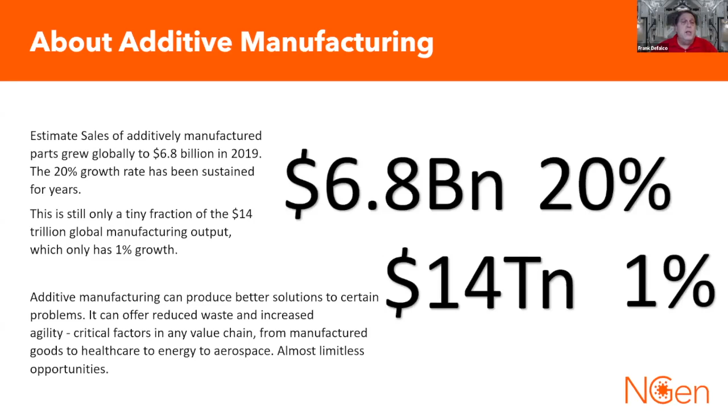If you need that, have a look at them. There are companies like Axis Prototype that have been doing that for a while—they really know how to take advantage of the technology. Coming into Ontario, I have companies like AMM. I'm going to show a case study from them.

Burloak, companies like Mosaic 3D have created a brand new 3D array printer, which NGen helped fund—just to help. The idea is to get to production. Much of what we're trying to do at NGen is introduce additive as a production option, not just as prototyping. Prototyping is great, it's been done for a while.

Going west to Manitoba, we have Precision ADM—one of the world leaders in medical device building with additive. They do some really great stuff; I'll show something about them afterwards as well. Going further west to Alberta, you have Exergy, a great company really doing stuff in the energy sector to help make it greener.

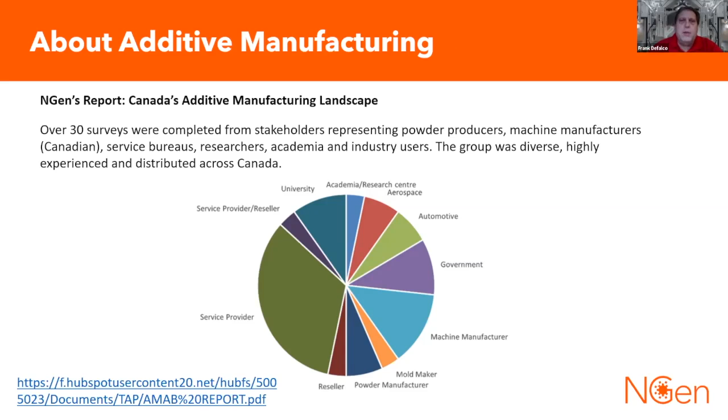And this is something, as Michael mentioned earlier, I do lead the advisory board at NGen. So we regularly meet, trying to keep a pulse on where the sector is, what we can do to help, and most importantly, how we can help industry understand how to take advantage of the expertise offered around Canada. So let's go to a case study, okay?

We'll come back to—here's the case statement. This is done by Additive Metal Manufacturing, a group in Concord, Ontario, GTA, Toronto if you like. Here's a program I've worked with them on just recently, just a few weeks ago. This is with a company called AEM Power Systems, okay?

So if you see the initial step file, that top one, A, okay—it has critical internal features that have been designed and optimized. They couldn't be changed, okay? So if you look at B and C, AMM was able to offer some alternative designs with a few different iterations, until they finally arrived at D. It's hard to believe they're actually the same part.

They took the approach of printing only what was necessary. That's one of the big reasons we call it additive versus subtractive or traditional manufacturing—you're adding material versus machining, where you're removing material, which is kind of a green component about it.

I don't want to necessarily call that a very green technology. It does take a lot of energy, but that's an area where there's a lot less waste, and less waste is certainly a really important consideration for the world. So this substantially decreases the size and mass, and as you do that, it becomes cheaper.

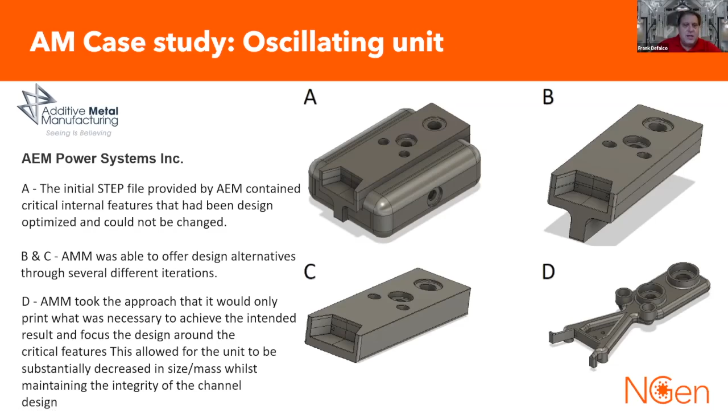Okay, so after the multiple CAD design iterations, the final design, you can see again going top to bottom, it was put onto the top. It's a 70% weight savings, print time reduced by 57%, and the price is a 58% savings. Again, because of those things where you have less print time. Most of the cost for additive is materials and print time, so if you're able to reduce both, you get less than the initial design.

So some of the benefits are design freedom, speed to market, part consolidation, avoiding assemblies and tolerance stack up, mass reductions, thermal management opportunities, and importantly, complex geometries.

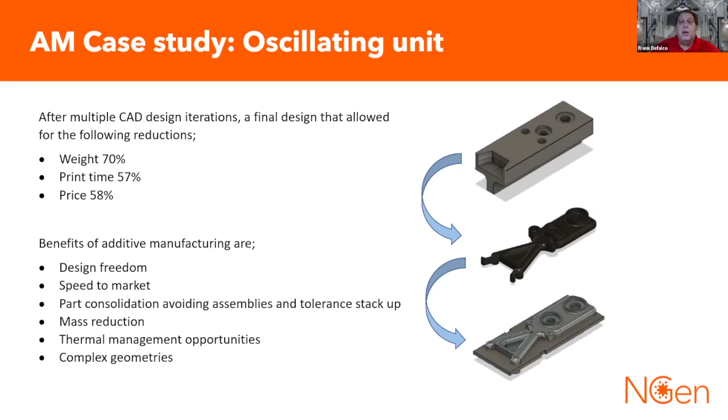Okay, so that's a really interesting project, and I'm glad to help fund this through our AM demonstration program. So here's an interesting project that was done by Precision ADM. If you remember, they're the ones from Winnipeg. This was a groundbreaking project.

This is one of my, I don't know, feathers in the cap, if you'd like, that I was able to fund with just a $5,000 project. So you can see a pipeline inspection gauge. You can see the gentleman there putting it into a pipeline. So as it is, it's inspecting the pipelines, and you can see it a little bit better.

I have a couple of other pictures, but one of the great things is that when the company approached me about using additive as part of their manufacturing production, they weren't sure of the quality of the metal. Okay, could it stand up to the rigors of the environment they're working in? Right, it's really, let's face it, it's oil and it's a pipeline. It's not some place where most machinery is going to hold up.

So as I explained to them, if the company knows what they're doing and you get a quality metal part, it's equal, if not superior, to cast, or superior to a cast. So it's a good way of doing it. So we funded the project.

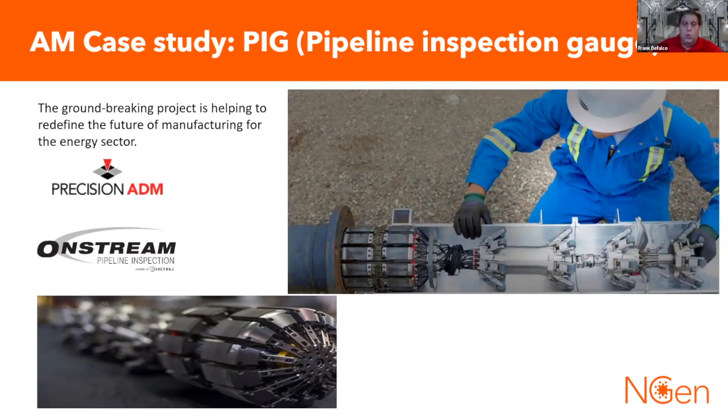Okay, you can see here on the right, my contact over at OnStream, the company that did this, told me he called this his little terracotta soldiers. Okay, so that's the parts, the different parts built on a build plate. So you can see you get several amounts of them. So there's a little bit of economies of scale, not a lot, but there is some.

But you're not looking to do millions, right? If you're looking at additive, you're looking for low production runs. So that's the area. If you're not looking to build hundreds of thousands or millions, if it's just hundreds or thousands, you may want to consider looking at additive as an alternative, because you can really shorten your supply chains and your time.

Okay, so by consolidating parts, improving lead time, AM offered a solution to reduce costs and create a newly designed pig with improved performance, while allowing design, this is important, design to dictate form as opposed to manufacturing techniques. So you really are allowed to envision how you would like it to look. And then, there's always going to be constraints with whatever technology you use.

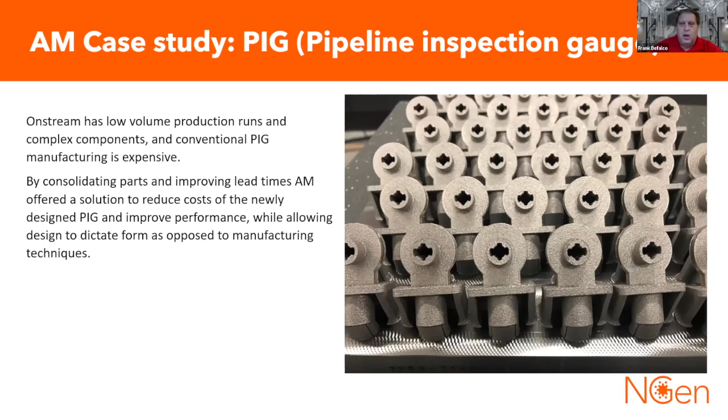That's true, but the idea is that you do have a whole bunch of new freedoms and a whole bunch of concepts to consider, new ways of building things that are exciting.

So that's great, just to let you know, okay, when I did that with a $5,000 project, the company is now buying $1 million worth from the service provider. So Precision ADM has become one of their main service providers and sourcing of products. So they started with one part, now they're using many parts as you start to investigate.

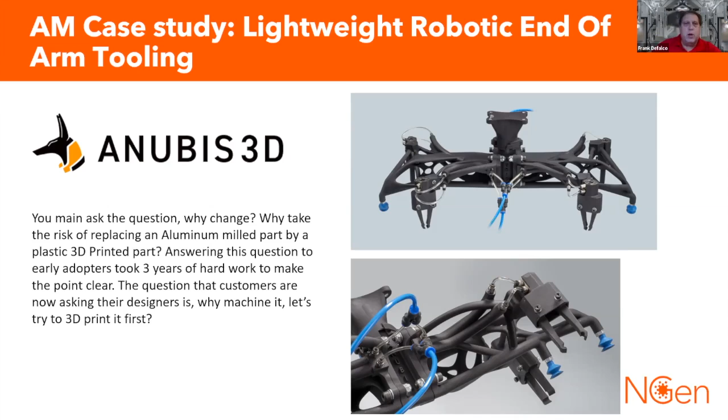It's really, really a particular area to look at for assembly line and end of arm robotics. One of the really interesting parts of additive that's only starting to really take off. Okay, Burloak, some of you may know, is in Oakville. It's a division of Samuel. This is a project they did with MDA, a satellite antenna parts. These are, again, space, aerospace, the sweet spots for additive because you're not making millions of satellites. You're going to make a few, if not maybe just one.

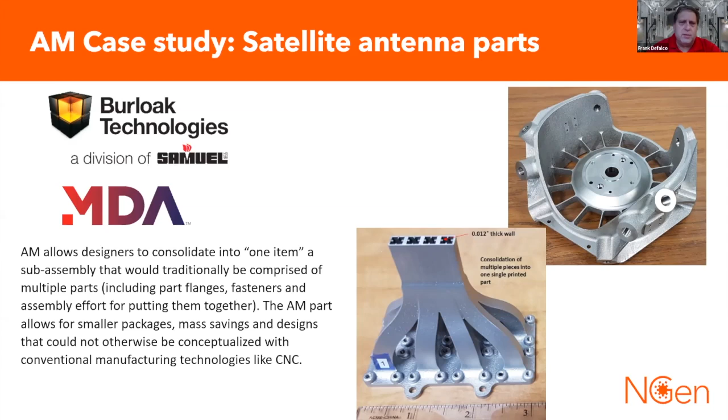So you don't need a lot of parts. AM allows designers to consolidate into one item a sub-assembly that would traditionally be comprised of multiple parts, including flanges, fasteners, and assembly effort. So you save even money because you're not having to assemble those parts. It allows for smaller packages, mass savings, and designs that could not otherwise be conceptualized. You can't do that with a CNC machine. As great as CNC is, it's great, but one thing to remember is additive isn't going to replace traditional manufacturing. It's a new tool. I'll talk a bit more about that afterwards.

Okay, so I want to talk about some of the opportunities and tips available. When you're talking about AM, think about part consolidation. You can save so much if you have a part with fasteners and clamps, hundreds of parts, and you redesign it. Suddenly you remove those hundreds of parts, and you think, great, now I don't even have to assemble those parts, so the time saving is there. But also you have to consider the overhead, the paperwork each part entails. When you're in business you always have to do inventory, and you don't have to count hundreds of parts anymore, you count one. So the savings can really be substantive once you look at the whole life cycle of a part.

Freedom of design - I showed you some of those parts we did. The design complexity is a whole new way of thinking you need to do. One interesting story I heard is that traditionally when somebody's designing, let's say, a channel for a manufactured part, they're going to make the channel circular because they're going to drill it. Well, you don't have to consider that. You can make it a square channel or a triangle channel. Maybe there's ways the flow works better in a different configuration. It doesn't make a difference for time because you're additively doing it, you're not drilling that hole, you're just not putting material where the hole was to be, and it could be any design.

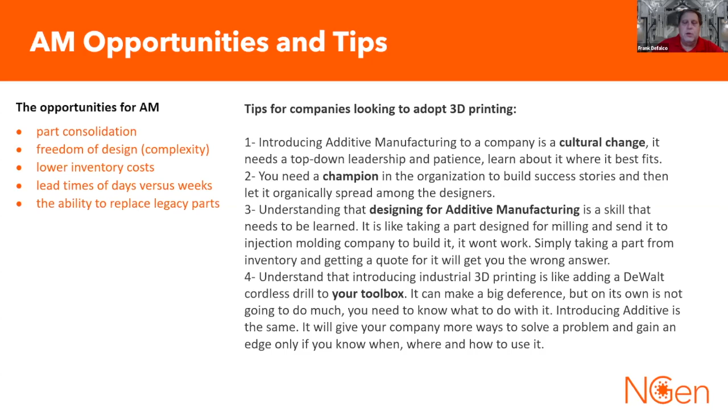So introducing it—it's part of your toolbox. Understanding that industrial 3D printing is like adding a DeWalt cordless drill to your toolbox. It can make a big difference, but on its own it's not going to do a heck of a lot—you need to know what to do with it. Additive is the same: it's a new and very powerful tool in your toolbox. It can make your company more competitive, solve problems, and help you gain an edge. But you've got to know when, where, and how to use it. Those are very important considerations.

So on to NGen's additive manufacturing demonstration program—something I've been running for quite a while. Before that, some of you may have known I was the lead over at Canada Makes, and one of my responsibilities was to run this program. I've seen hundreds and hundreds of companies come into the program, and I've told them sometimes, no, additive's not a good solution, which I found very useful. Sometimes companies are curious, they hear a lot of hype—hype is good, but it can build unrealistic expectations. Really, one of the goals is to find ways where you can introduce additive as part of your production. As mentioned, it's really useful for prototyping—that's been established for a few decades now. But the idea is, how can you use it in your production?

And I showed you a couple of examples there.

The requirements to participate: companies need to be NRC-IRAP eligible with a referral from their ITA. If you don't have an ITA, I'd go to the concierge service at NRC IRAP - it's a great free service available to all Canadian SME companies. I think you have to be in business for a while, but I'll look at that.

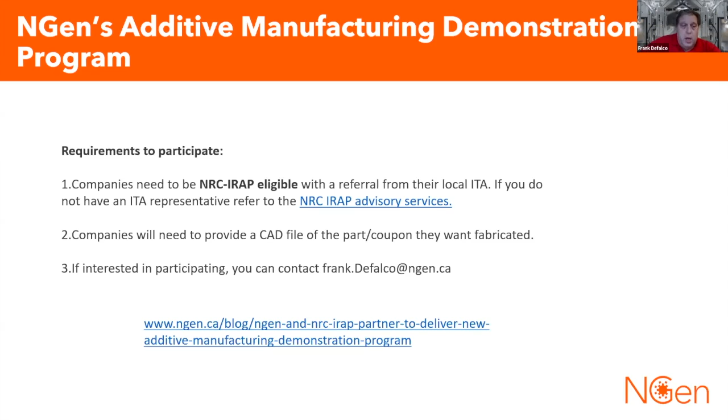So that's one thing you'd want to consider. If you're interested, you can contact me - frank.defalco@engen.ca. You can go onto our website, and if you can see the link below there, you can get to NRC and talk a little bit more in detail about the project.

So that concludes for me. If you have any questions, I'm open to them, and I hope it's been informative. I thank Dex and Michael for this opportunity to talk to you about NGen. NGen is really out there for Canadian companies to become better manufacturers, and of course additive is getting to be more and more of an Industry 4.0 technology. So I'm going to stop sharing and I'm open for questions.

Great, thank you Frank. That was a really concise summation of the advantages that I don't think a lot of people necessarily recognize - when it's appropriate to use it, and how you have to think in a very different way about additive manufacturing. It's not starting with a block and taking stuff away - you're trying to figure out how not to print material. It's really less is better.

Exactly. I was going to ask you - so if somebody is IRAP eligible, what is it that the program provides? Is there funding involved, so they would receive money?